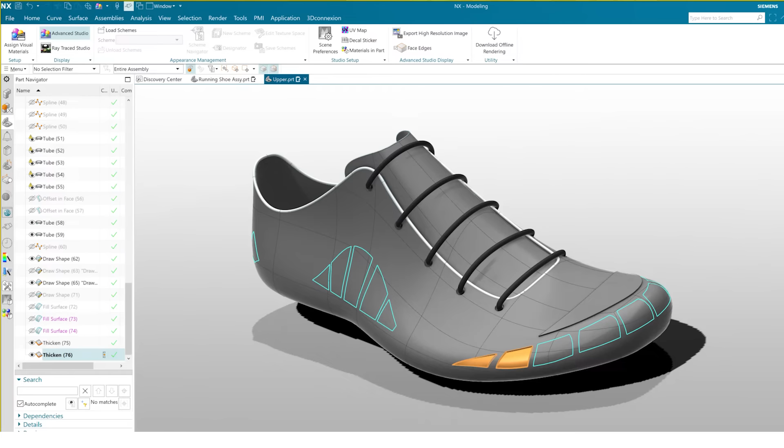Today I'm going to show you some tips and tricks for Draw Shape. This video is going to demonstrate how you can use Draw Shape. The model I will demo with today is this shoe created with an NX. I'm going to use the upper sole, so I'll go to that.

The first thing to note is that if you're using a touchscreen with Draw Shape, it might be handy to enable touch mode, which will optimize the icons for a touchscreen.

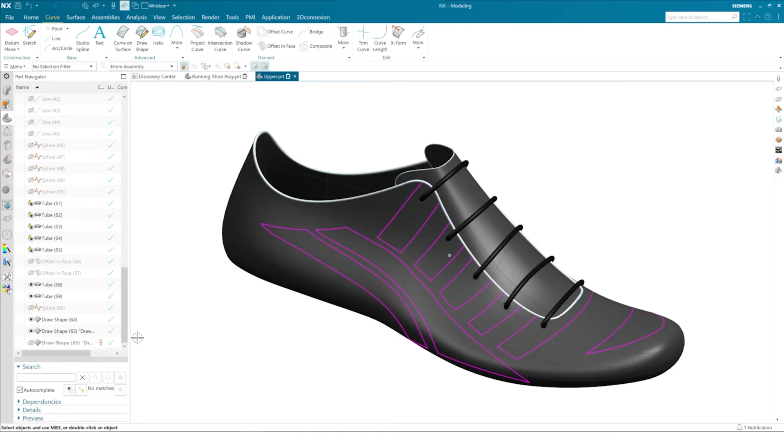Draw Shape is a tool for designing and idea visualizing. Here I am demonstrating a couple of design ideas for detailing on this shoe. You could insert a raster image to trace or use Draw Shape as a guide for Realize Shape to create specific polygon models.

To open Draw Shape, go up to Curve and you'll find Draw Shape. Click on the face or faces you want to draw on and click OK.

Something which can be useful before you start is Symmetry Mode. It allows you to mirror what you were sketching. For example, if you were to also draw on the left shoe here. I don't want this for now though, so I'm just going to click Cancel.

The first feature to note is Draw Stroke. Draw Stroke will create a line of exactly what your pen is drawing. It will not create a spline with points or snap to any shape. It can be useful for drawing or creating guides.

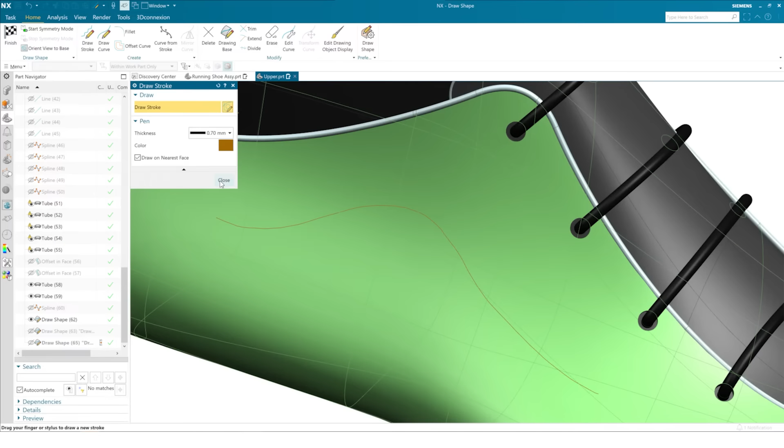The other option for drawing is Draw Curve. It will create a spline as you curve or draw, and it can snap to primitive shapes, straight lines, and it will even connect the ends of your lines and help smooth your strokes. You can adjust all this in the settings.

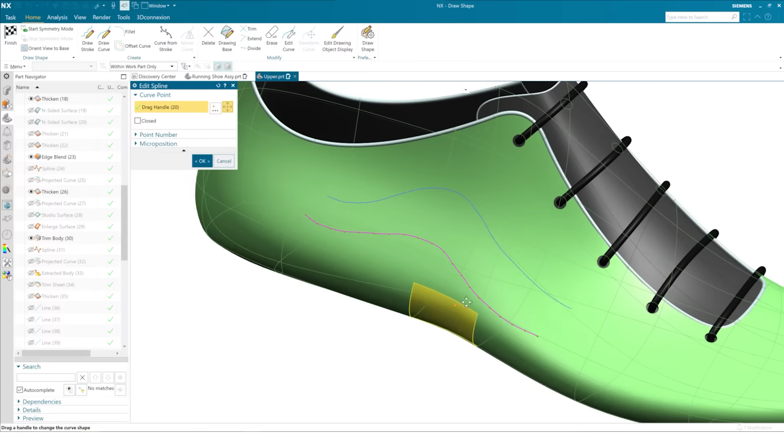You can change a stroke to a curve using Curve from Stroke, as I've done here. I can go and I can edit the lines I have drawn. So for example here, I want a smoother stroke than I've got. So I'm going to go and delete some of the points that were created when I was drawing.

You can also go back and adjust any of these points on the line you've drawn if you weren't happy with it. So that's what I'm going to do here, just to create a smoother curve from what I had initially.

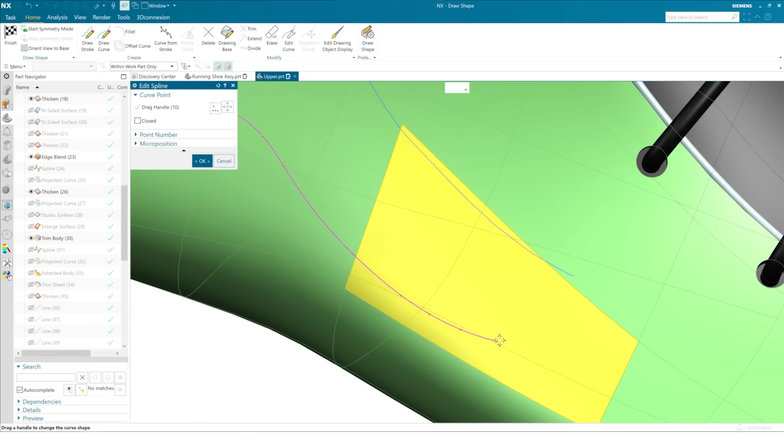I'm going to click OK once I'm done. And I'm going to go back to the top curve too, and I'm also going to do the same.

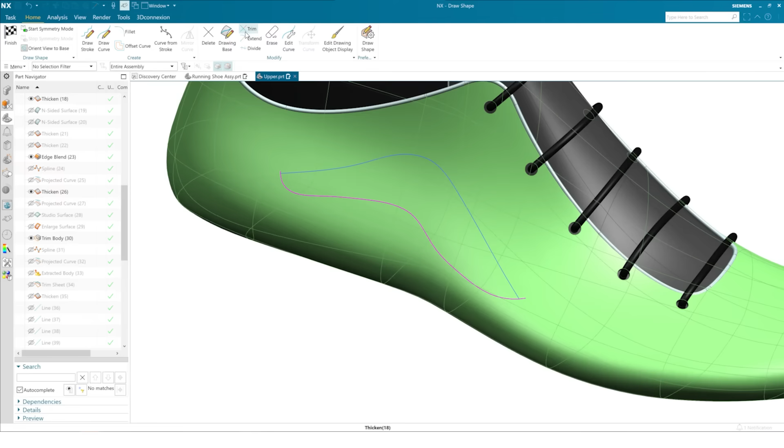You can use all the same sketching tools you'd be able to use on a normal sketch. So for example here, I'm going to use Extend, and extend the lines to cross over, and then use the Trim tool to trim the edges. Do be aware though, if you're using the trim tool and you have any sketches on the other side of your shape, it may trim those as well, so just check that you're not doing that.

You can also change the visual appearance of your line. So for example here, I want to make the top line look the same as the bottom, so I can change the width, and I can also change the color to be the same pink shade.

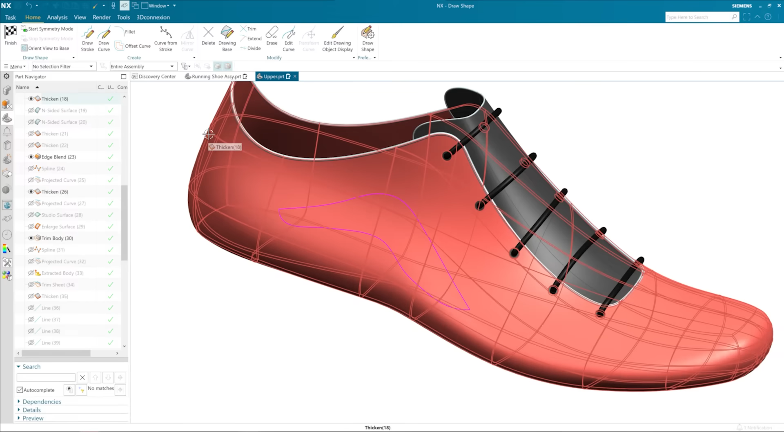Again, you can use the other tools that you would get in a normal sketch like fillet or offset. So that's what I'm going to do right now. You can use this to edit all the shapes which you have drawn by hand.

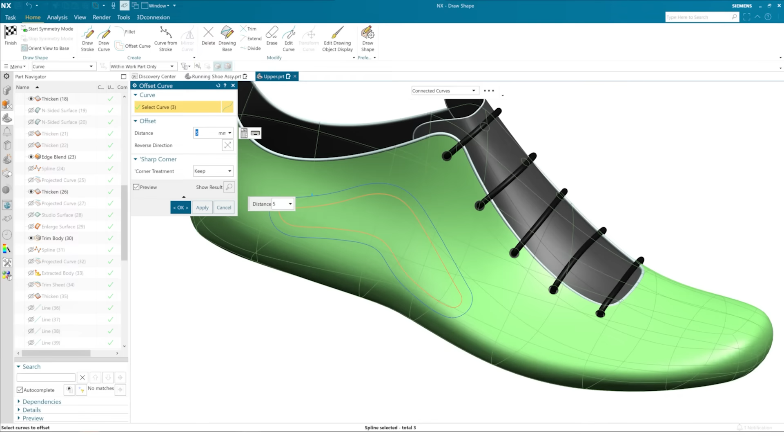It will snap onto your selected 3D face and follow the same form, which is something you won't get with the standard sketching. And once you're happy with the shape you've created, you can click Finish and exit Draw Shape.

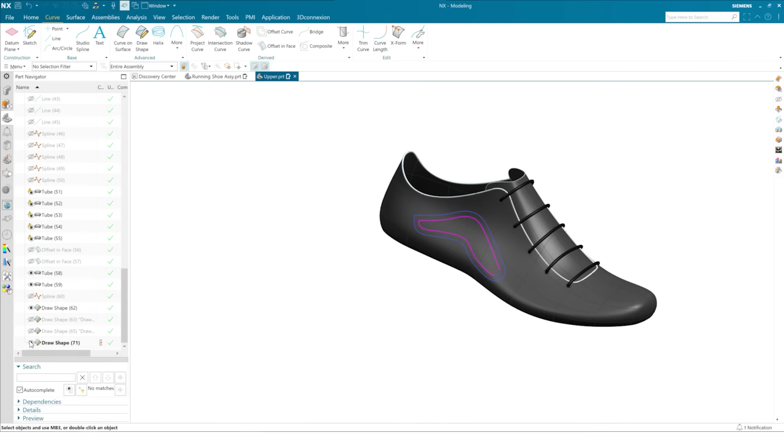Now you can see if you turn it around that it's followed the same 3D form. One thing you can do with a sketch like this is add extra dimension to your visualizing process. So I'm going to turn on the original sketches I had.

So I'm going to go up to the top and search for Fill Surface. Fill Surface will create a sheet body between the lines I've drawn.

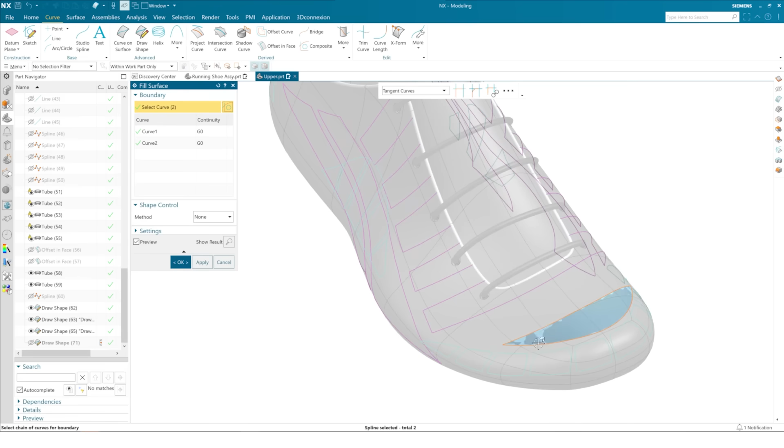Here, I'm just going to select a couple of the enclosed shapes I had already drawn. And then you can see it's creating a sheet body. Let's change it to connected curves. And I'll just do a couple of them to show you.

I'll go up to the top and search again, this time for Thicken. The Thicken tool will create some more geometry from these sheet bodies I've created.

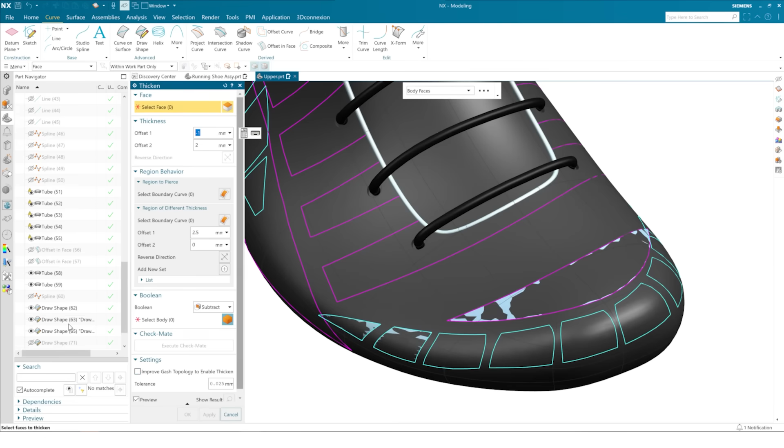So I'll select the fill surface that's appeared in the part navigator. And this first part, I'm gonna make negative 0.1 and offset 2 0.6. Since it's negative 0.1, it means it overlaps with the body below.

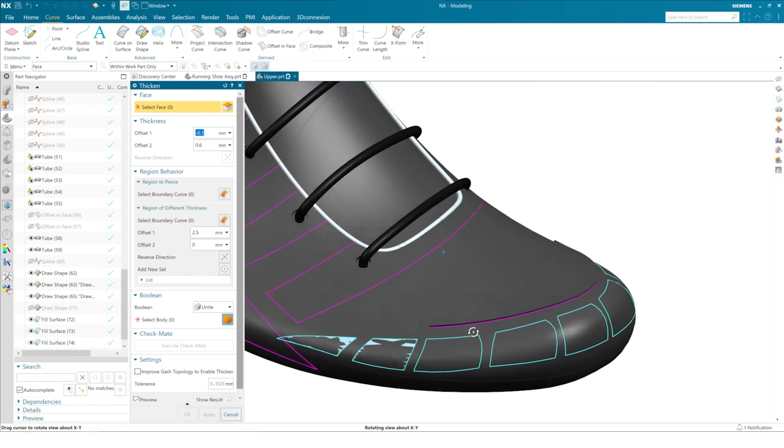So I'm then gonna choose the unite boolean and unite it to the body. And as you can see here, it's created a 3D surface.

So I'm going to do the same for these other two sections, except this time I'm going to subtract them so that you get a kind of dented section. You could also do it so that it goes the whole way through and you have a hole.

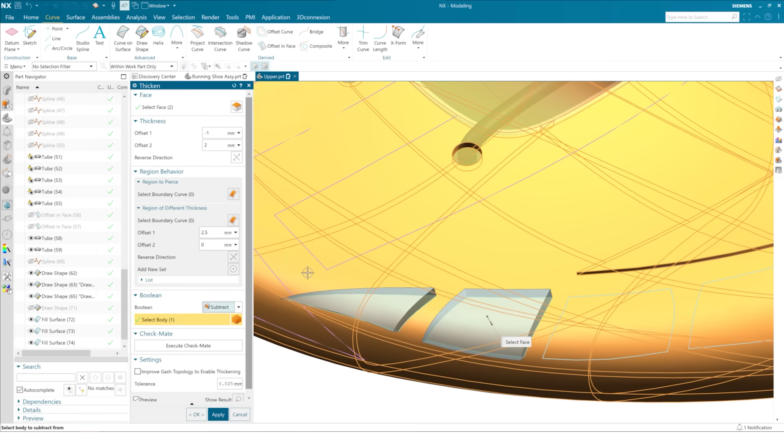This can just help visualize design changes a bit more, and it shows how Draw Shape can benefit your design process in a few different ways. So I'll just hide the lines and the sheet bodies and you can see the full visual effect.